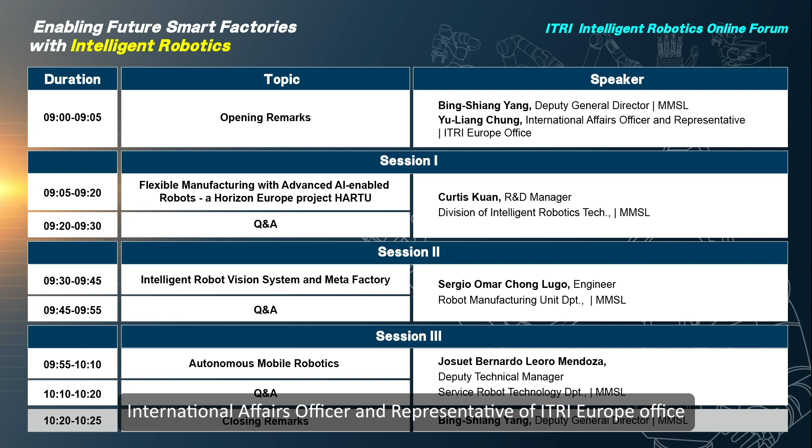Esteemed participants and distinguished guests, a warm welcome to today's online forum. My name is Bing-Shiang Yang, Deputy General Director of Mechanical and Mechatronic System Research Laboratories, MMSL, at Industrial Technology Research Institute, or ITRI, in Taiwan. We are delighted to have you join us as we embark on an exciting journey into the world of intelligent robotics and its transformative impact on manufacturing.

In this dynamic era of Industrial 4.0, the fusion of robotics and artificial intelligence has changed the way we conceptualize, design, and operate our factories. The rise of intelligent robotics has opened infinite possibilities, empowering industries to enhance productivity, efficiency, and safety like never before.

Throughout this forum, we will share our experience working with international partners in Horizon Europe's HARTU project, and our contributions toward achieving flexible manufacturing with advanced AI-enabled robots. We will see how auto AI annotation and domain randomization approaches bring about VR and digital twin technologies which make Meta Factory possible. Lastly, we will delve into the most ingenious advancements in autonomous mobile robots, or AMR technology, including industrial AMRs and its target follower function, pick and place, robust localization, as well as extended applications into cleaning and art. Three researchers will share their insights, experience, and vision in their areas of expertise.

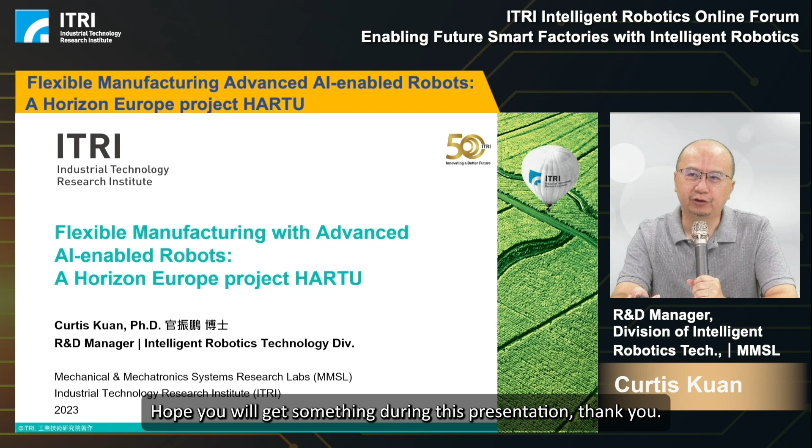First, here is the outline of today's presentation. First, a brief overview of ITRI Robotics is introduced. Then, how we joined the HARTU project, including the origin and the progress to HARTU, and what exactly HARTU is. Finally, a conclusion is provided.

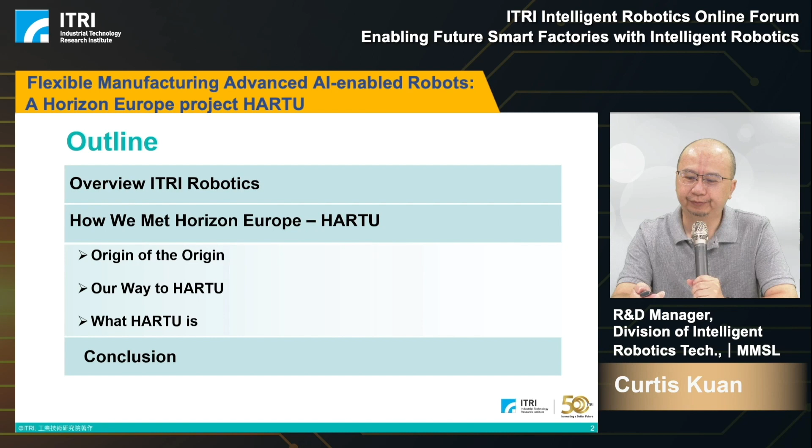As we know, ITRI was founded in 1973. It's an independent nonprofit innovation institution in Taiwan. Our scope is developing technology for commercialization and nurturing open innovation with academia, industry, and global partners. That is why I am here to introduce our global collaborations, especially with European partners. And the other scope is incubating and spawning startups for emerging industries.

As we know, the most famous spin-off companies are TSMC and UMC in semiconductor areas. ITRI has several offices around Taiwan and global branches in Tokyo, Japan, San Jose, Silicon Valley in the United States, and Berlin for European business.

Here is our basic information about ITRI. We have Tainan campus, headquarters in Hsinchu, and Taichung campus. We have many staff with PhD degrees and master degrees, and total patents around 32,000 and more.

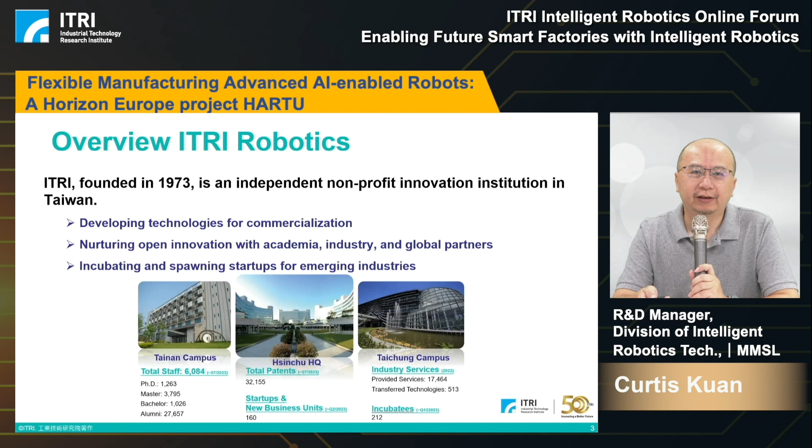This slide will introduce our robotics achievement in the past years. For the future, we have robotic development in ITRI. We have core technology related to controllers that we call I Can Think, the vision system for robotic systems that we call I Can See, and several applications and use cases in practical industrial areas we call I Can Work, and mobility, I Can Move.

For I Can Think, we especially developed the robotic controller, navigation algorithm, and simulators with EZSIM and ASim. The vision system for the robotic system we call FOVision, especially for object recognition and navigation.

And I Can Work, we have implemented several industrial applications, such as in aerospace manufacturing, drilling, or painting for high-speed railway, grinding and polishing applications for semiconductor instruments, and the robotic weaving system for composite material handling.

And I Can Move, we have developed the dispatching system for multi-AMRs, and we have fleet management software for AMR systems. This system right now is introduced to a semiconductor plant. Furthermore, we also have medical robots as our focus, such as robotic bronchoscopy with diameter less than 3.5 millimeters. Here is our brief overview of our robotics achievement.

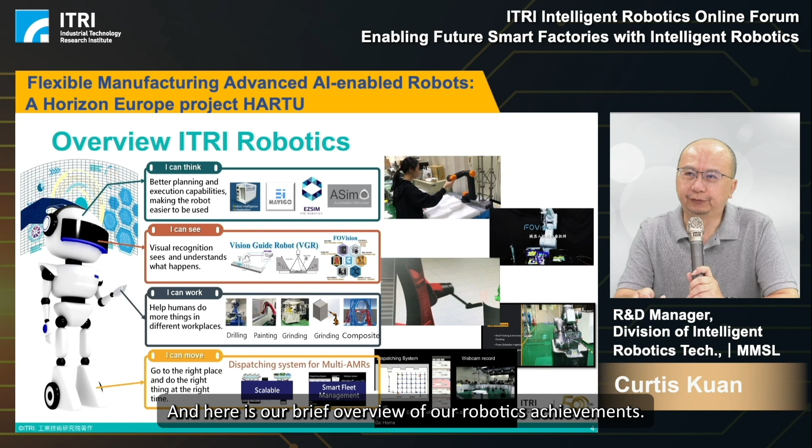Here, the next page, we want to say how we met Horizon Europe HARTU. I want to introduce the origin. From 2002 and 2003, we joined the European project we call Muffins.

This project is related to multimedia processing in the MPEG-21 environment. Here we can say ITRI is one of the partners, and the other partners are Imperial College in the United Kingdom, and IMEC for Belgium, and other partners from all over European countries.

And the other project from 2003 to 2005, we got another partner from Switzerland. From this project before, based on our research capability in the past, almost 20 years ago, we joined these two projects. From these experiences with European partners such as Fraunhofer, Imperial College, IMEC, Vodafone, we have learned several lessons.

The first one is that the basic core concept idea is very critical: use cases and the user scenario first. Then, based on this user scenario and requirement, we can implement the technology development.

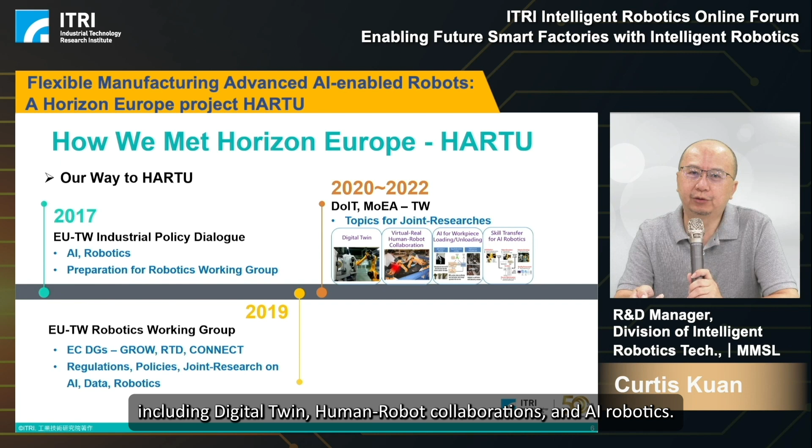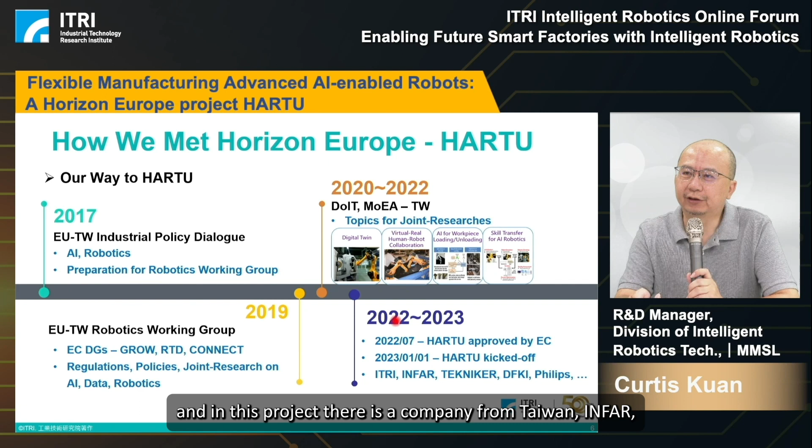Through 2020 to 2022, both sides of EU and Taiwan discussed joint research topics, including digital twin, human-robot collaboration, and AI robotics. Based on our consensus, in 2022 ITRI cooperated with the German AI Research Center DFKI, the Spanish research institute TEKNIKER, Philips Consumer Electronics, and the Turkish automobile company, forming a research consortium.

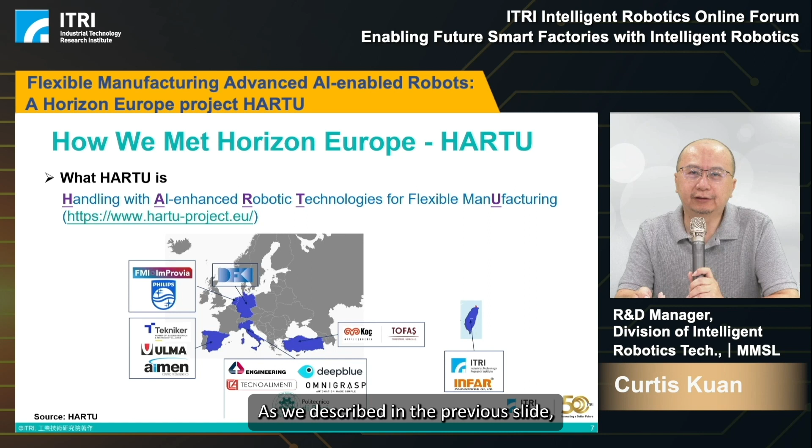We call it HARTU. This project got approval from the European Commission and kicked off in January this year. A company from Taiwan, INFAR, also joined this research consortium. So what exactly is HARTU? HARTU is the abbreviation for Handling with AI enhanced Robotic Technologies for flexible manUfacturing. As described, there are several partners from all over Europe, plus two partners, ITRI and INFAR, from Taiwan.

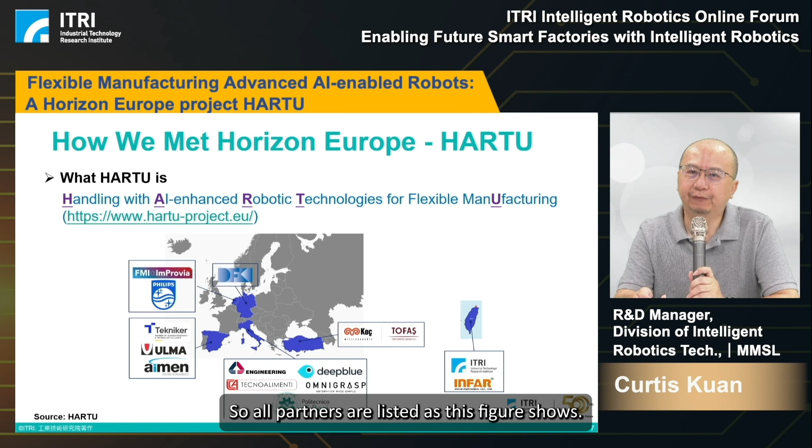All partners are listed in this figure. In HARTU we want to focus on 5 use cases. The first is fixtureless assembly, especially for hand tool manufacturing, which will be implemented by the Taiwan partners, ITRI and INFAR.

The second use case is assembly for consumer electronics, implemented by Philips and TEKNIKER, from the Netherlands. Then there's the logistics use case and car assembly transport, implemented by TEKNIKER and TOFAS, the Turkish automobile manufacturer.

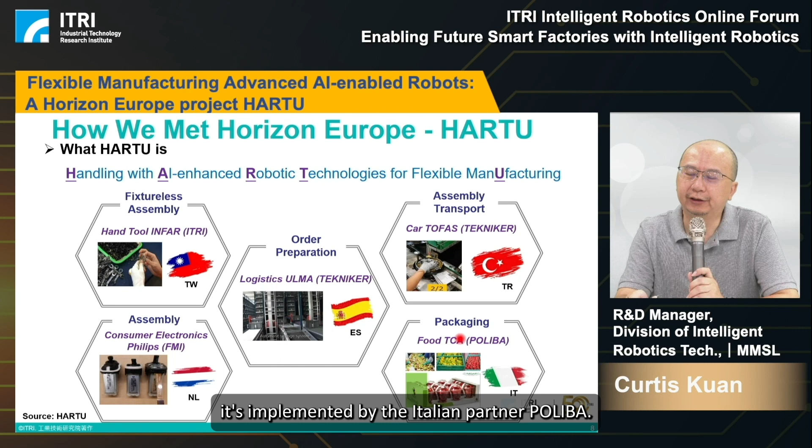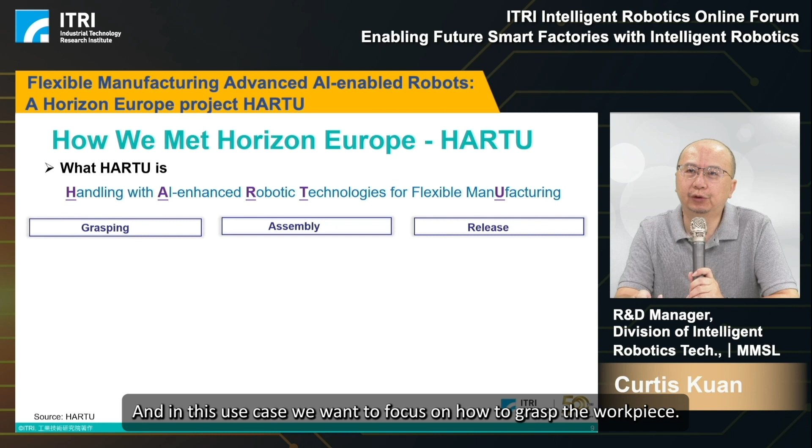Especially for the packaging use case, it's about food handling, implemented by the Italian partner POLIBA. In this use case we want to focus on how to grasp a workpiece, such as how to grasp it in the right position and the right orientation.

So here we will handle various workpieces such as hand tools, electronic components, foods, vegetables and others. From grasping, we need to assemble all the components into one product, so we need to handle the contact force, assembly procedure, accuracy, and compliance between the workpiece, and adaptation to various workpieces with different size and weight.

Finally, we have to put or place the assembled product into the right place, so we need to handle the position and how to package all the workpiece. So here is our scope for the HARTU project.

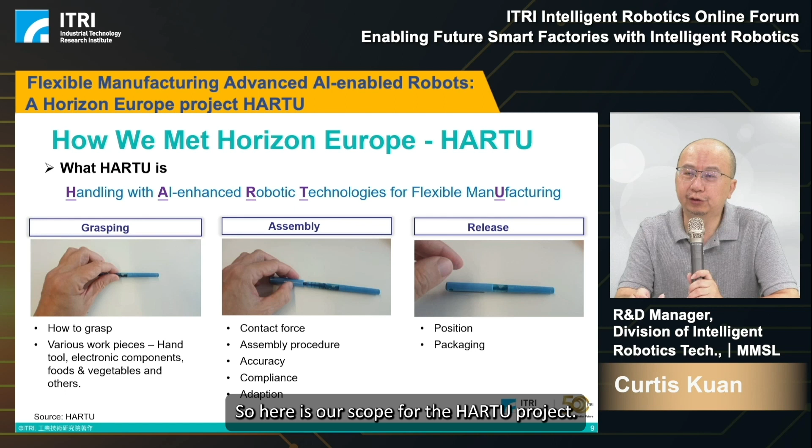Finally, here is a brief conclusion. HARTU is a real international research project with 6 countries, none with mother tongue English. By participating in this project, we will learn how to cooperate with various countries from Germany, Spain, Italy, Netherlands, Turkey, and Taiwan. We have to achieve consensus and compromise with each other, and do the assigned work with due diligence.

Here is the reference for the Horizon Europe Cooperation Framework. The European Commission has assigned a 95.5 billion budget for research and innovation activities.

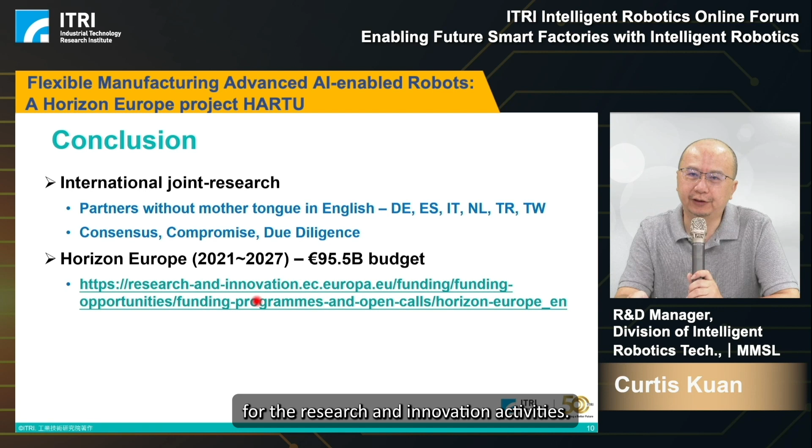One more slide for Horizon Europe. In this Horizon Europe there will be 49 European partnerships, including several clusters, for example health, digital industry and space, climate energy and mobility, food, bioeconomy and agriculture. For us, we will pay more attention to AI and robotics. So here is for your reference. If you are interested in participating in an EU project, we can cooperate.

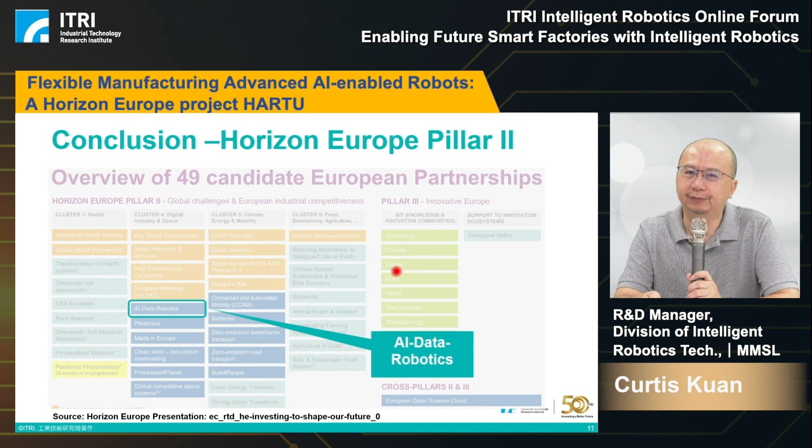Hello, Curtis, can you hear us? Yes. Hi, Curtis. The audience just learned about your very unique experience working on the HARTU project, and some have emailed us with follow-up questions. Would you please be kind enough to answer them? Here is the first question.

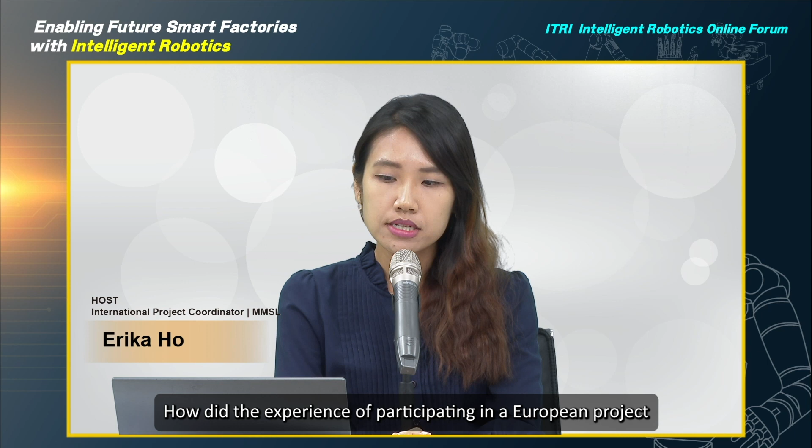How did the experience of participating in a European project inspire your research enthusiasm?

From that experience, the main purpose of technology development should be inspired by how to make our life better, or how to provide better service. So that is why I have learned we need to develop such technologies to provide human beings a better life or better services. So here is my reply.

So from the real use case requirement, we can use our knowledge to develop such technologies to support our goals, aiming at a better daily life. So here is my advice for those people who want to join the European research project. Thank you. Thank you, Curtis. Thank you for such wise advice.

Lastly, our audience would like to know, how can generative AI help technology development? Yes, as we may know, the main purpose of artificial intelligence, or AI, is that AI can deal with the uncertainties that humans may not be aware of. So during the whole manufacturing process or in our various applications, we may adopt AI to deal with such uncertainties.

And because artificial intelligence technologies are getting smarter and more intelligent, we can adopt AI for different use cases and various applications, so that we can use the advantages of AI to deal with several issues during our technology development. Thank you. Okay, thank you, Curtis, for your recommendations.

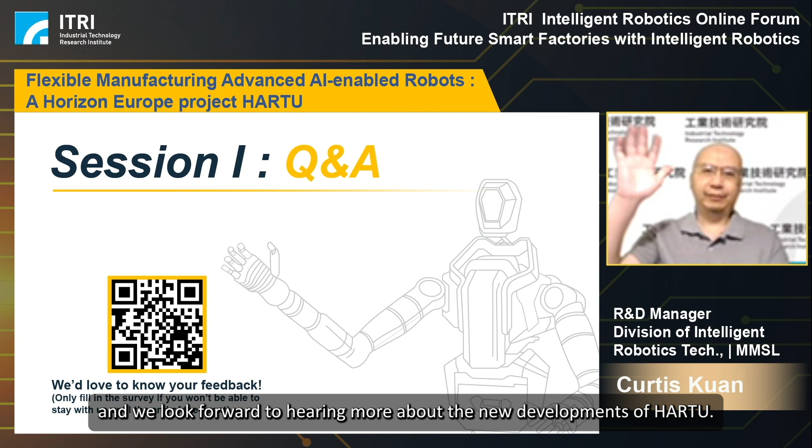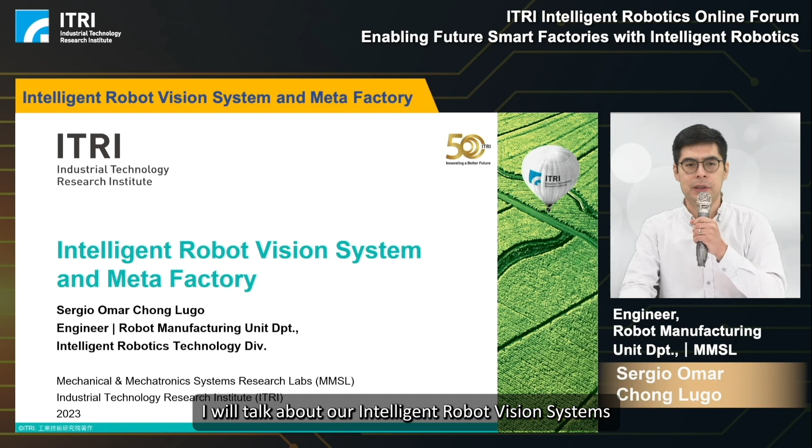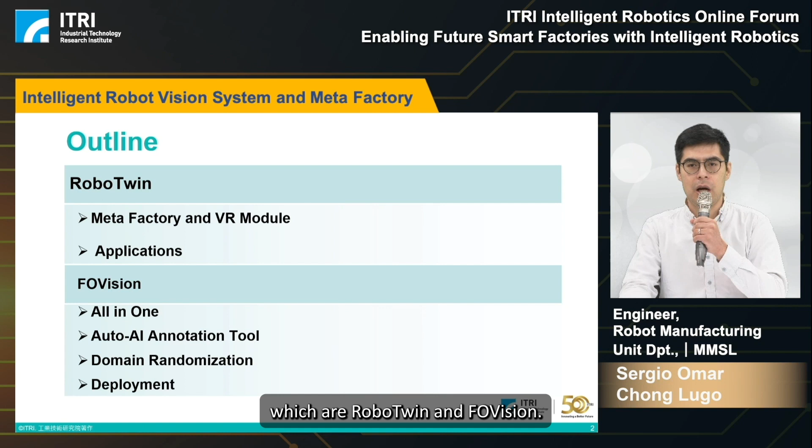Okay, so our next speaker is Sergio. He will talk about robot vision system and MetaFactory. Sergio, welcome. Hi everyone, I'm Sergio. I am an engineer from the Robot Manufacturing Unit Department at ITRI. Today, I will talk about our intelligent robot vision systems and MetaFactory developments. I'm going to introduce two key products developed by our department, which are RoboTwin and FOVision.

Nowadays, in the context of global connectivity, increased demand for efficiency and an accelerated production pipeline, businesses are making their physical factories described entirely in terms of software. No matter where users are located, with the aid of 3D digital environments, virtual reality deployment, and a communication scheme between digital and real assets, users can perform sensitive operations in the digital world and bring optimizations to the real world. This is the idea for MetaFactory, which serves as a realistic virtual environment replicating actual factory layouts, robotic cells, and workpieces.

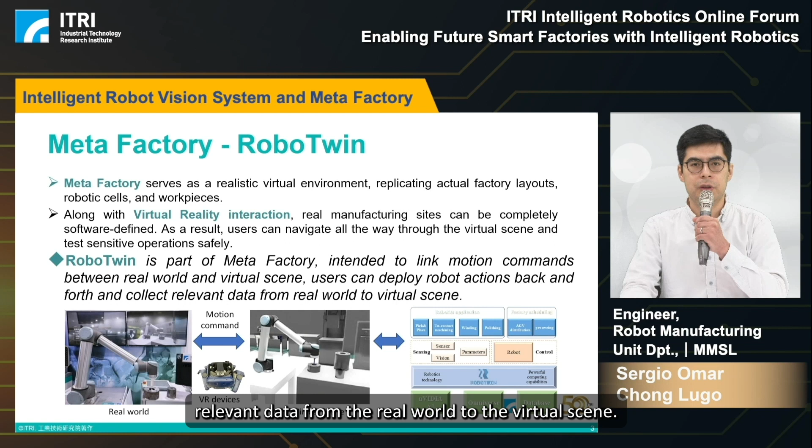Along with virtual reality interaction, real manufacturing sites can be completely software-defined. As a result, users can navigate through the virtual scene and test sensitive operations safely. More specifically, RoboTwin, as part of MetaFactory, intends to link motion commands between the real world and virtual scene. Users can deploy robot actions back and forth and collect relevant data from the real world to the virtual scene. The purpose of RoboTwin is to achieve feasible human-machine cooperation by connecting VR equipment combined with a high-fidelity physics engine from NVIDIA Omniverse, resulting in a human-machine mixed interactive simulation technology.

Here we have one video. For instance, the user is wearing a VR headset and grabbing a virtual stick using one of the VR controllers, making the virtual robot follow the stick. This action is related to robot teaching. In another case, we have a user wearing a VR headset. Meanwhile, the virtual robot is performing defined motion commands, and data coming from the real world in the form of images and other graphics are projected into the virtual environment for the user's interest.

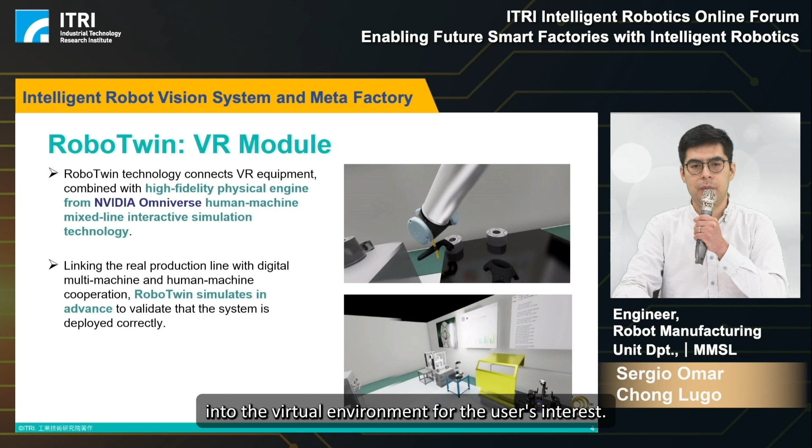RoboTwin comes with two operation modes. The first one is known as follow target mode. In this mode, the user grabs the virtual stick and the virtual robot will follow this tool in real time. Therefore, joint states will be shared to the real robot, resulting in real-time synchronization. Robot safety is also considered, along with a robot reset option to prevent both robots from any undesired displacement. One more feature is that 3D animations of workers are included in the virtual scene to make the virtual reality experience more realistic.

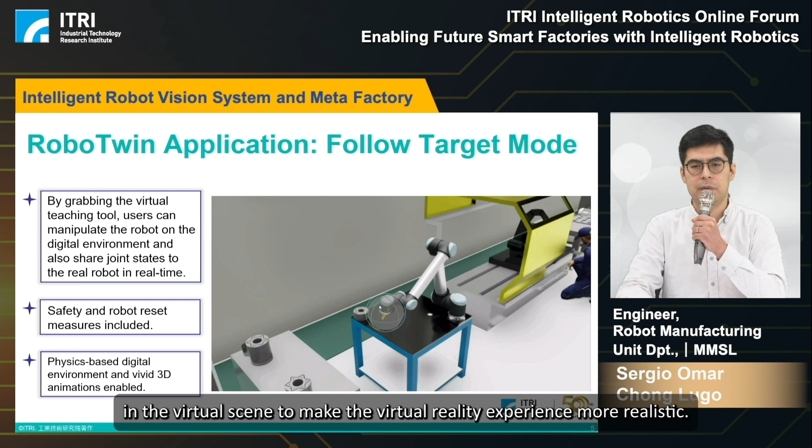Let us now refer to RoboTwin's second mode, known as play mode. In this mode, the virtual robot is given defined motion commands. Those are shared to the real robot to achieve real-time synchronization. At some point, data from the real robot is collected and projected into the virtual robot. This is all part of a loop to simulate a running production line.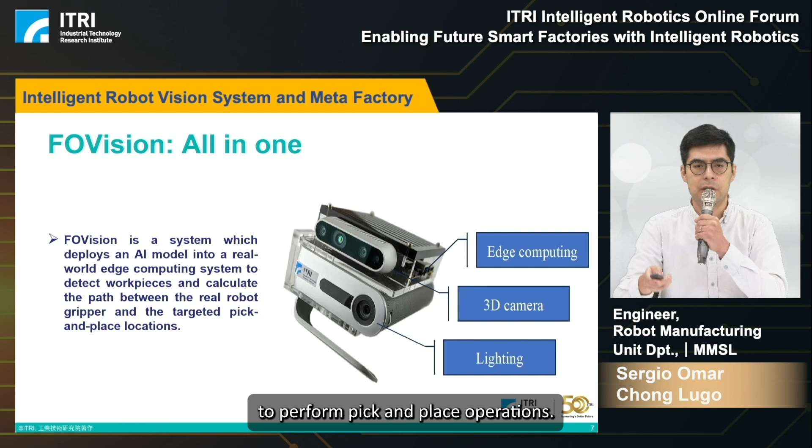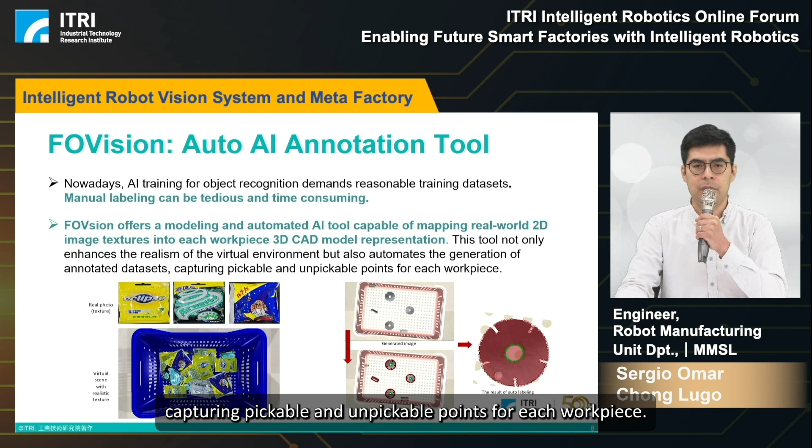As a matter of fact, AI training for object recognition demands reasonable training datasets. Therefore, manual labeling can be tedious and time-consuming. In contrast, FOVision offers a modeling and automated AI tool capable of mapping real-world 2D images into each workpiece 3D CAD model representation. This tool not only enhances the realism of the virtual environment, but also automates the generation of annotated datasets, capturing pickable and unpickable points for each workpiece.

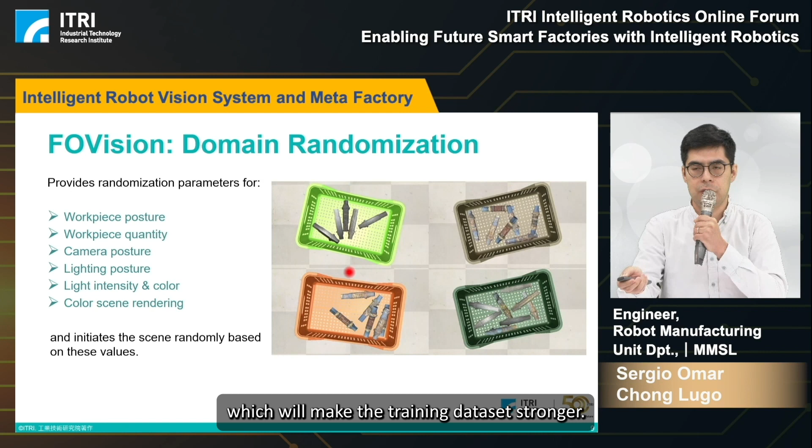To ensure that valid training dataset acquisition is doable, the AI annotation tool makes use of our domain randomization approach. In this way, several parameters will vary, such as workpiece posture and quantity, camera lighting and posture, light intensity and color rendering as well. So here we can observe how the algorithm makes the change in the bin color, and also the objects are placed randomly, and they all have variations which will make the training dataset stronger.

So with all this being said, let us observe FOVision deployment. Considering a real working environment, FO Vision collects data from a container loaded with metallic pipes and commands an industrial robot arm. The synthetic training dataset generated to train the embedded AI object recognition model proves to be valid in this case. So here we observe the objects loaded into the container, and then we can see the masks obtained by the AI object recognition model. And all of this is the result of the trained dataset, which has the variations mentioned before.

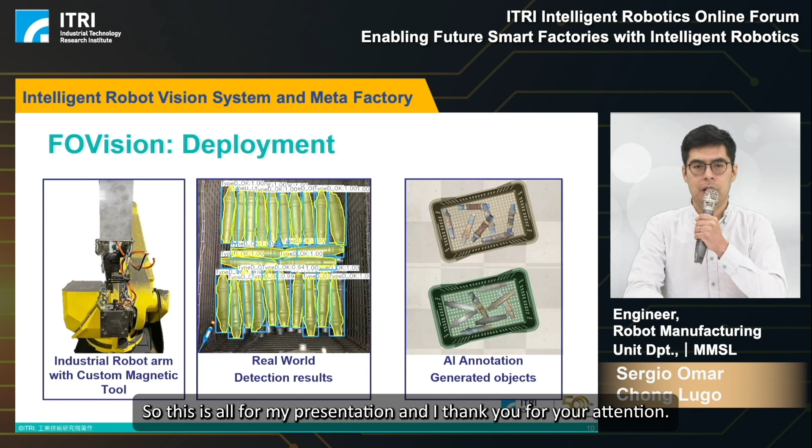Concerning your topic, we've also received some follow-up questions via email. So the first one is, how many configurations can FO Vision be deployed in? Hi, thank you for the question. Let me reply right now. With FO Vision, we handle two modes mainly. One is known as eye-in-hand. This is well known in the field of robotics. In this mode, the camera is mounted on the robot's end effector or gripper. The goal of this method is to determine the transformation between the camera and the robot gripper or robot flange. Here we handle this case using a checkerboard, and we have developed our methods to achieve this eye-in-hand calibration.

And we also consider the other mode called eye-to-hand. In this case, the camera is mounted apart from the robot, and we also make use of the checkerboard to achieve this calibration. As I mentioned before, we have developed our methods and algorithms to achieve this result. And honestly, most of the time we use FO Vision in the eye-to-hand mode, but we are open to consider other conditions. So we can work with different scenarios depending on the production line, and we have used FO Vision pretty well recently.

It's possible to bring different files all together, and it can manage several layers in CAD files. So this allows digital twins to work, and it is also possible to collaborate remotely with this platform. You can bring several workflows into one, and I really believe this is a very powerful piece of software which we can understand pretty well, and we use this as part of our development.

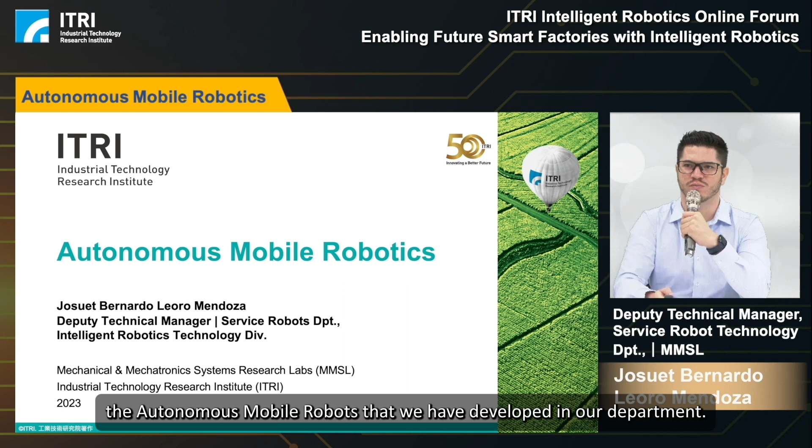So my presentation is going to consist of two parts. First, I'm going to give you a short presentation of the intelligent AMR solutions that we have developed. And then in the second part, I'm going to show you some interesting applications where we combine robotics with arts.

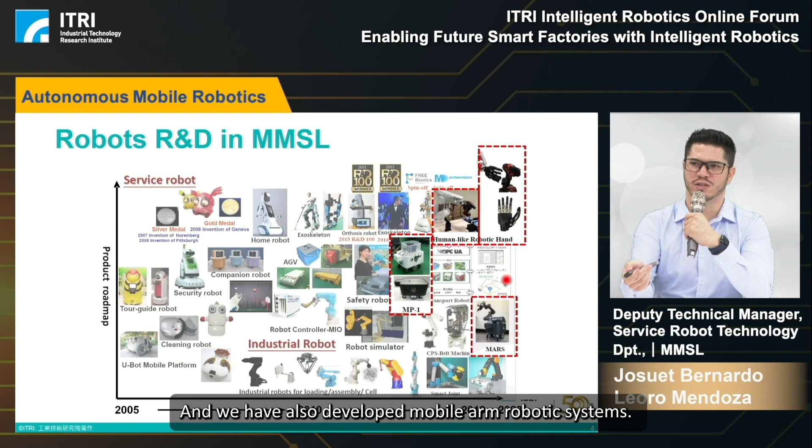In our department, we have been developing autonomous mobile robots for quite some time, but we also have developed other types of robotic systems. For example, we developed a human-like robotic hand, and regarding the autonomous mobile robots, we have developed some mobile-base robots. In this case, this mobile-base robot can carry 100 kilograms, but we have developed platforms for 250 kilograms, and we are hoping to soon develop platforms for up to 2 tons. And we also develop mobile arm robotic systems, like, for example, this robot here called Mars Lite.

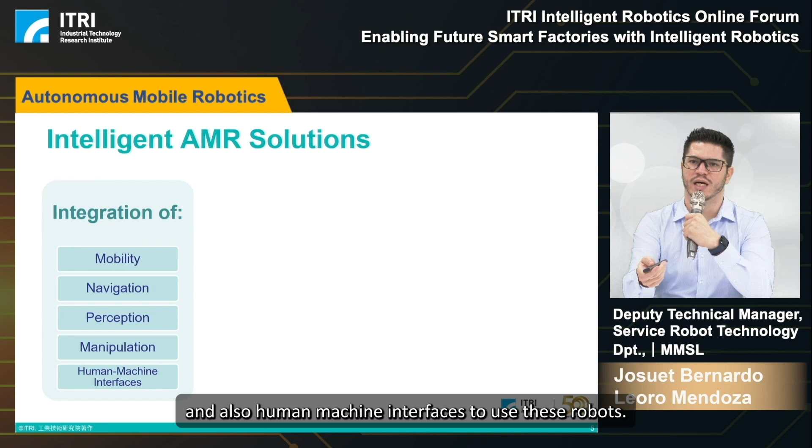Now, in our intelligent AMR solutions, we need to integrate mobility, navigation, perception, manipulation in the case of mobile arm robots, and also human-machine interfaces to use these robots. And using all this integration, we can develop solutions for the industry. For example, the mobile arm robot here that we can use for pick-and-place applications and other applications that require the robot arm. We also have developed some applications for the autonomous forklift. For example, in this case, we developed a technology to perform the pick-and-place of a pallet.

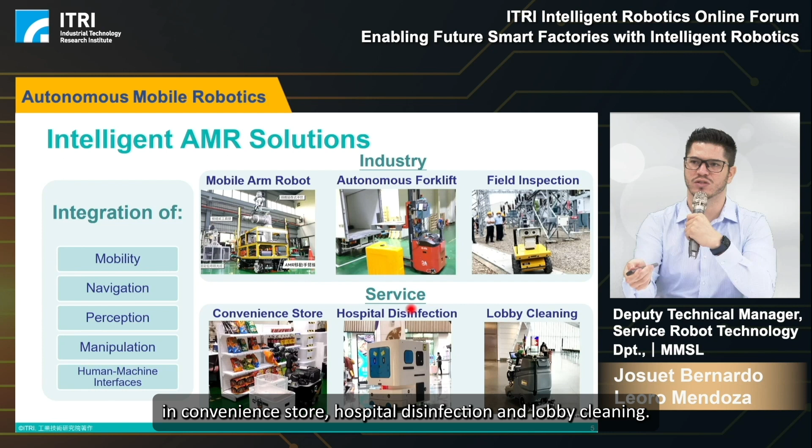And we also have done some outdoor mobile robots where we use a robot to monitor an outdoor area for some companies. And in the case of service, we have also been developing technologies to be used in convenience stores, hospital disinfection, and lobby cleaning. Now, for the case of the industrial applications, I'm going to give you two short case studies. And the first one is the pick and place in a manufacturing cell.

And as you can see in this video, this holonomic mobile manipulator is picking a workpiece from this manufacturing cell, and then it will place it in other locations around this manufacturing cell. This was done to mimic a real manufacturing cell where we have multiple processes that these workpieces have to go through, and this mobile manipulator will be in charge of moving around these workpieces.

We also use the same mobile manipulator to perform other specific tasks. For example, here we have the LCD carrier polishing, where we use the mobile manipulator to approach this LCD carrier, and then we perform the polishing in 4 steps.

As you can see in this video, we're polishing the first quarter of this LCD carrier, and then the robot will move to the 3 other locations where we will perform the polishing task.

For these industrial applications, we developed the following technologies. First, we developed a task manager and a task executor. The task manager will take the tasks one by one and use the task executor to execute them. Combining these technologies, we can do quick reprogramming of the robot. For example, we can change the arm trajectories, the mobile-base goal, docking operations, and other tasks. This task definition uses a simple and intuitive XML format, so it's really easy to reprogram these robots using this task manager and task executor.

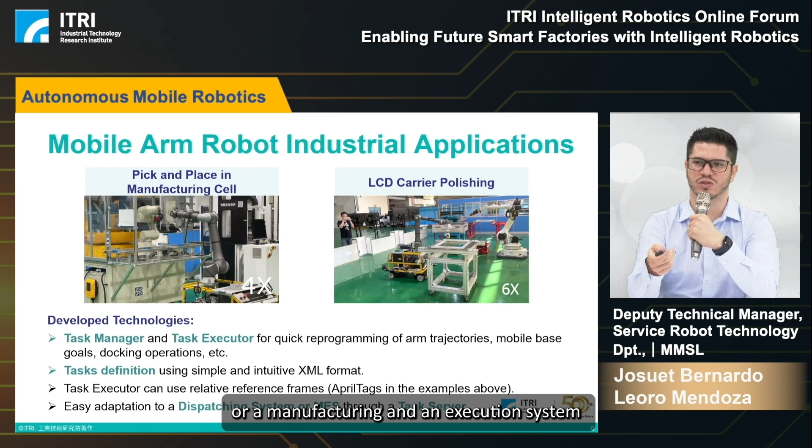This task executor can also use relative reference frames. For example, in the 2 videos I showed you, we use AprilTags to reference how the movements are going to be done. These 2 technologies are also easily adaptable to a dispatching system or a manufacturing execution system using a task server, which leverages the task manager.

Now, in the case of service applications, we have the lobby cleaning, as you can see in the top left. This is an Ackerman-type robot, and we adapt our technology to this existing cleaning robot to perform lobby cleaning. You can see the robot performing the cleaning trajectory that we computed based on the cleaning area that the user wants to do.

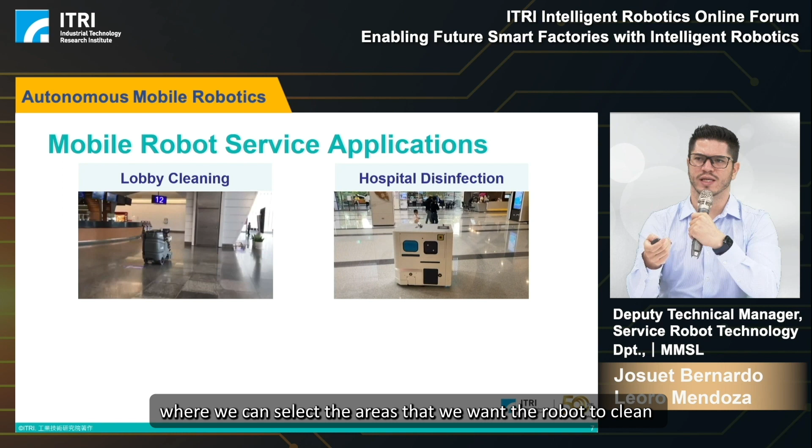We also have hospital disinfection, which uses similar technology where we can select the areas we want the robot to clean, and also select the areas the robot should not go to. This was already applied in the National Taiwan University Hospital here in Taiwan.

The technologies we developed for these 2 service applications include multi-area, multi-block cleaning path generation. This means that if you have a big map and want to clean multiple areas, you can select these multiple areas one by one, and also select some blocks you want the robot to go to. The robot will then find the optimal path to move between these areas. We can also select forbidden areas, which are areas we don't want the robot to go, maybe because we're doing maintenance there or for any other reason.

We also developed an intuitive operation, an Android-based HMI, as you saw in the lobby cleaning case, where we have the screen to select the map we want to use for cleaning, or to select the task schedule or other tasks. This selection of allowed and forbidden areas can also be done through this HMI, and we can generate the task schedule for all tasks using the HMI.

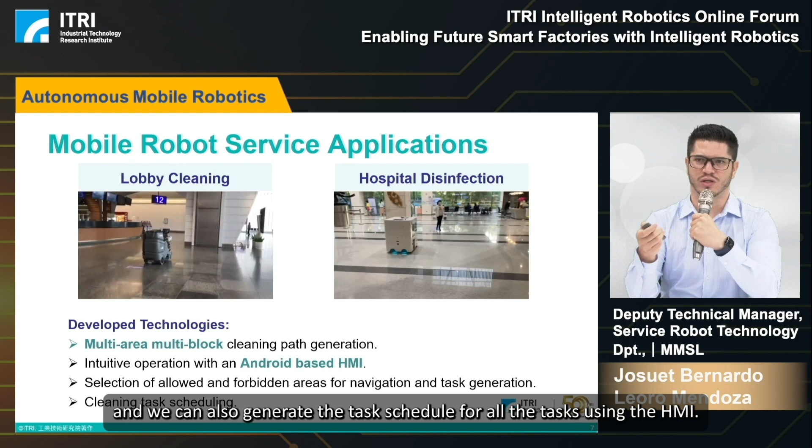Now, we've also been doing research to execute complex trajectories with mobile manipulators. As you can see here in the top left, the robot is moving around this Lissajous path, continuously tracking this trajectory while it moves. You can also see in this second example that the robot is following a sinusoidal path.

This type of trajectory can be used for applications where you actually want the mobile base and robot arm to move continuously. A simple example is if you want to open a door - you could do this step by step, first moving the platform and then moving the arm. But a more optimal way is by coordinating the movement of both the arm and the platform to open the door.

The technology we developed in this case is the coordination of the robot arm with, in this case, a non-holonomic mobile base, but we can adapt for holonomic and non-holonomic. The non-holonomic case is more challenging, so that's why we worked on it.

We also had to do redundancy resolution to execute these complex trajectories because this is a 10 degree of freedom robot arm. Because this is a highly redundant robot, we also need to consider singularity avoidance to allow the robot to perform this task. We also included self-collision and joint limit avoidance as constraints to execute all these paths. So in both videos, you saw the robot executing the task while continuously avoiding singularity, self-collisions, and joint limits.

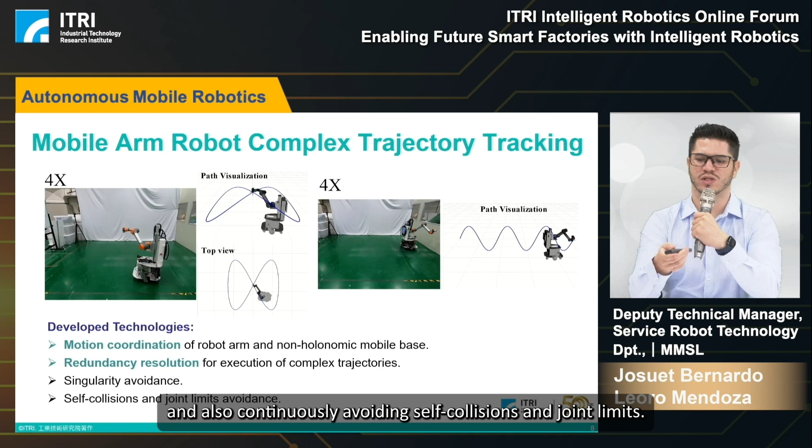Now, in the second part, as I said, we're going to show you some examples of how we combine robotics with arts. In the first case study, we have the Freeperson project by the artist Tao Ya-Lun. This project was presented in the Patchlab Digital Art Festival last year in Krakow, Poland.

In this case, what the artist requested from us is he wanted to use a VR headset, which you can see on the top left. The headset is at the beginning showing a video that is the idea of this artist to show around the area where he feels he's trapped because he can only see around. Then after this video finishes, we will see that the mobile manipulator on the top and bottom left will start moving and tracking the movements of the headset.

So what the artist requested is, can we follow the movements of the headset around this area? He will walk around this area, as you will see in a couple of seconds. Once the video finishes on the top right corner, the mobile arm robot will start moving. What you see right now on the top right is the stream of the camera mounted on the end effector of the robot arm.

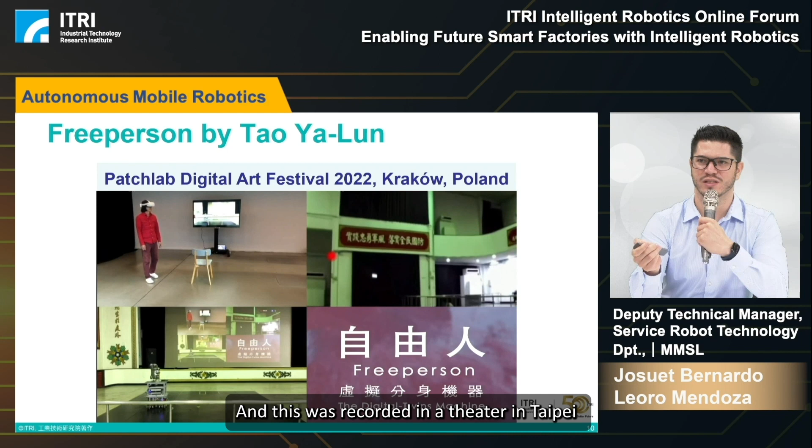Right now, as the user, in this case the artist testing our project, is moving around this area, the mobile arm robot will follow his movements. It will follow the movements of the head as well as his location around this area. As you can see on the stream, we're constantly streaming all the movements so that the user feels like it's actually in Taiwan. This was recorded in a theater in Taipei, while the user is in Poland, in another country.

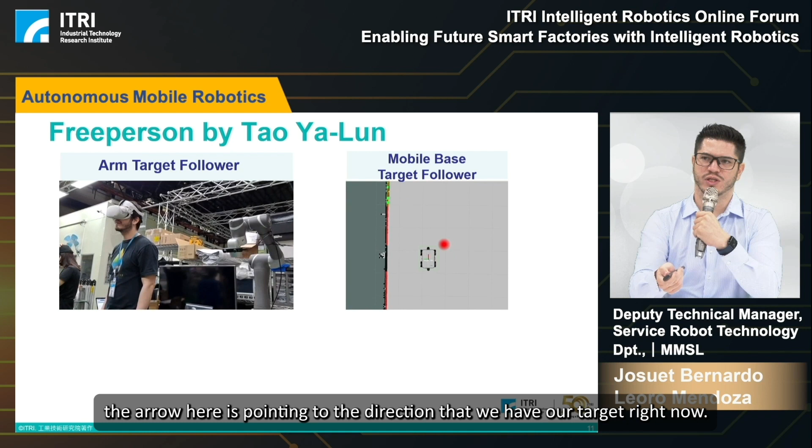For this specific case, we needed to develop an arm target follower. As you can see in this video, the arm is following the movements of the headset as the user moves around. We also needed to develop a mobile base target follower, and in this case the mobile base needs to follow a target. The arrow here is pointing to the direction of our target right now. While it does so, we also have to consider there might be some obstacles around the environment, so it needs to avoid moving to those areas.

Now, the technologies we developed for this project were a remote control for the mobile arm robot, and as I told you, this is a remote control from a different country to Taiwan. Then we developed a smooth Cartesian velocity control for the 6 degrees of freedom robot arm, as you saw with the movements of the arm. This target follower also needs to consider constraints like joint limits and workspace limitations. For the mobile base target follower, we included collision detection, as I just mentioned. All the execution we performed was using the MQTT protocol, which is how we receive the task from the headset to tell us where the mobile manipulator should go.

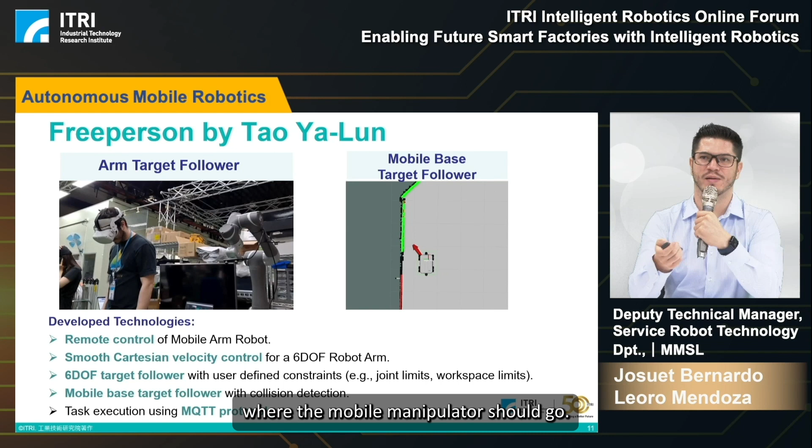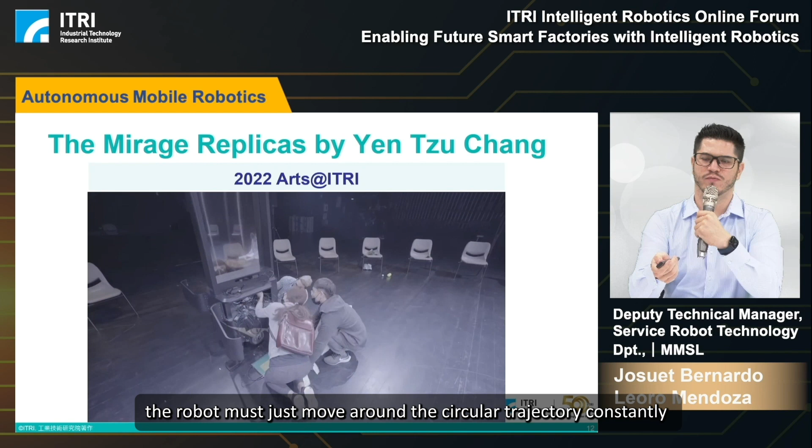Now, the second study case, we have this artist asking us to perform the movement of a mobile platform in this circular trajectory that you're seeing in this video. In this case, the robot must just move around this circular trajectory constantly while a performer is moving around it. The challenges in this project were, first, that the lighting conditions change a lot, so we have really dark areas when the performer is moving around, and also a lot of light in some areas.

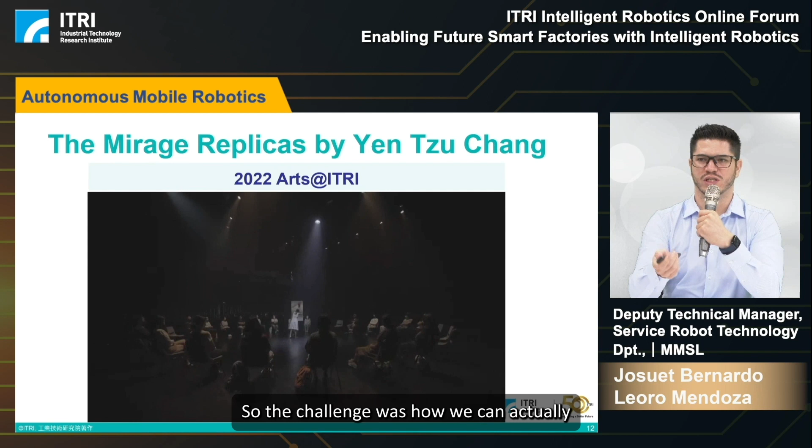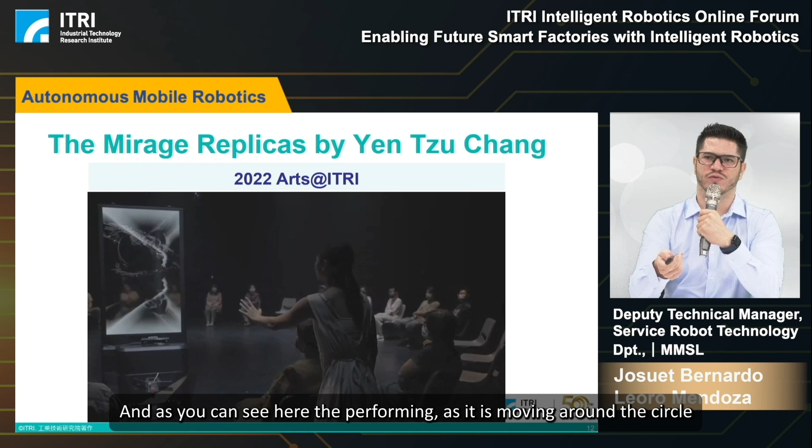As you can see here, the mobile base is already moving around this circle. The problem was that because the audience is going to be seated around the performance area, there is no way to acquire features to actually localize the robot inside this circle. So the challenge was how we can develop some localization algorithm for the mobile platform so it can move around accurately inside the circle. As you can see, as the performer is moving around the circle, and we're showing some video through this transparent screen, the robot will keep moving around the circles with high precision.

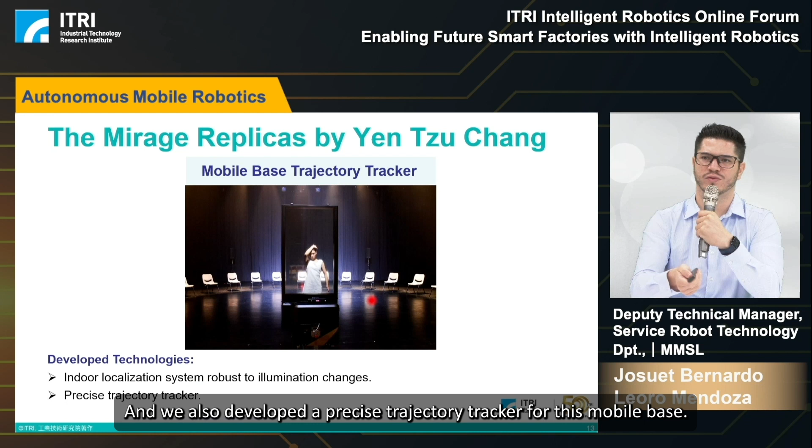For this specific case, we developed an indoor localization system that is robust to illumination changes, and we also developed a precise trajectory tracker for this mobile base. This is the end of my presentation.

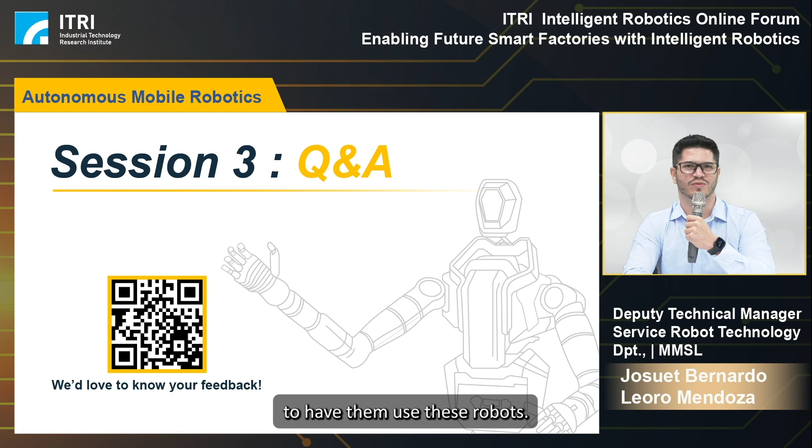Because while the prices are a little bit expensive, I think it will be really complicated to get them to use these robots. Okay, thank you, Josue.